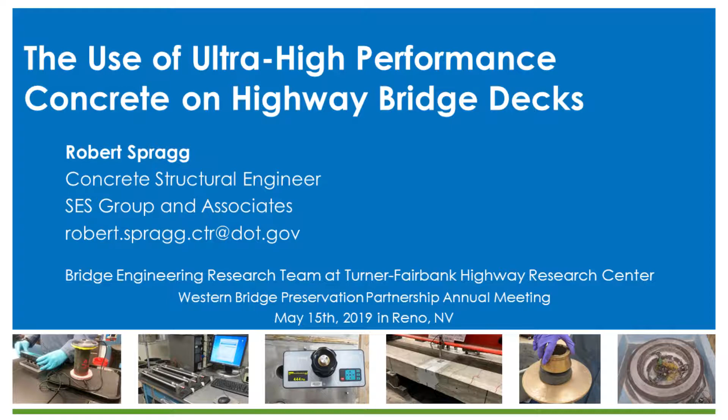I'm going to be talking about the use of ultra-high performance concrete on highway bridge decks, and specifically looking at bridge deck overlay applications of this type of material.

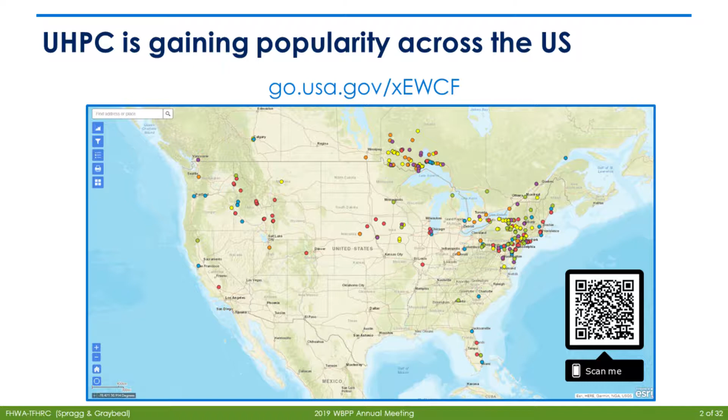UHPC is gaining popularity in the United States. Here's a picture of the projects that we've kept track of that have happened across the United States since 2016. If we look at the region probably of most interest to the people in this room, we see there are a fair number of projects. Maybe some of you have had the opportunity to work on a UHPC project. These projects include lots of different types.

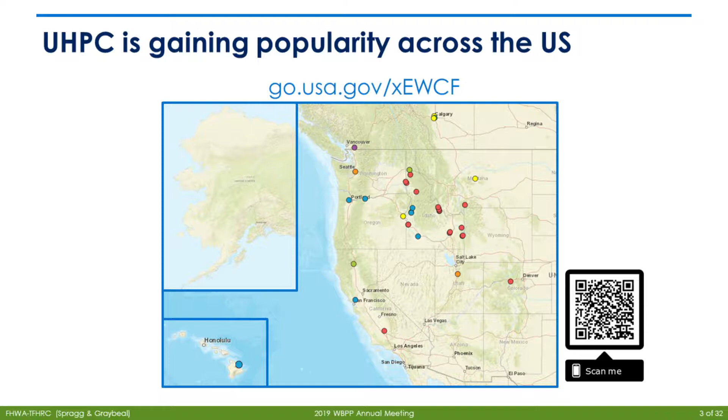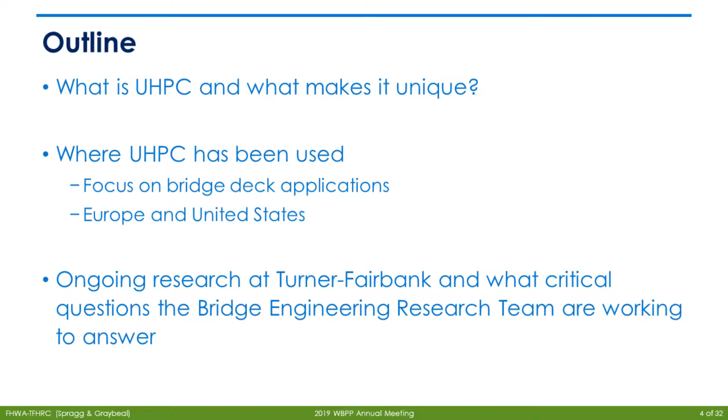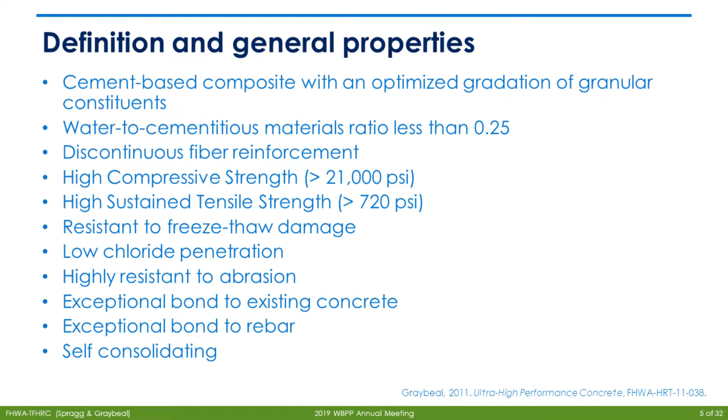It does have fiber reinforcement, and most of the time for structural applications these are steel fibers. It has greater than 21,000 PSI compressive strength and then greater than 720 PSI tensile strength. And it has a lot of other properties that are also important.

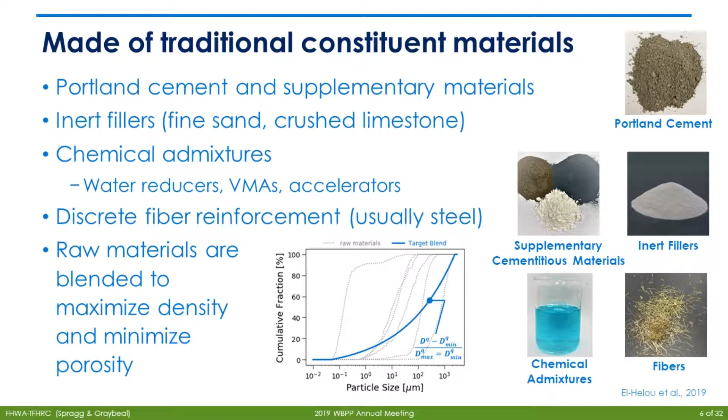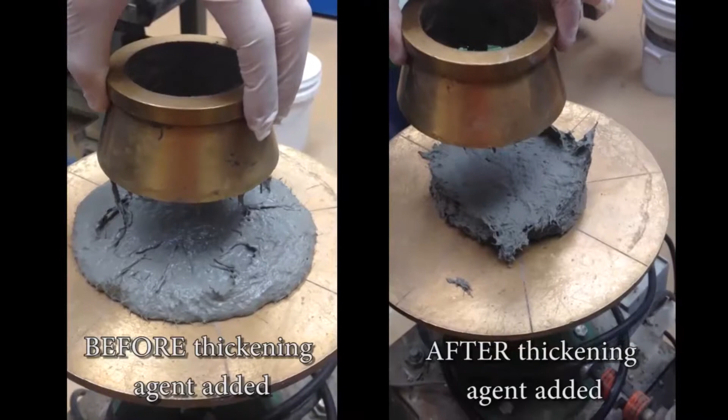This might look like - or a video, I guess. So UHPC in most typical applications is used like the one on the left, which is like a self-consolidating material. But in applications where you're worried about a bridge deck that might have a super elevation, you would probably want to add what they call a thickening agent, basically to make sure it doesn't move around too much or flow off your deck into the water below.

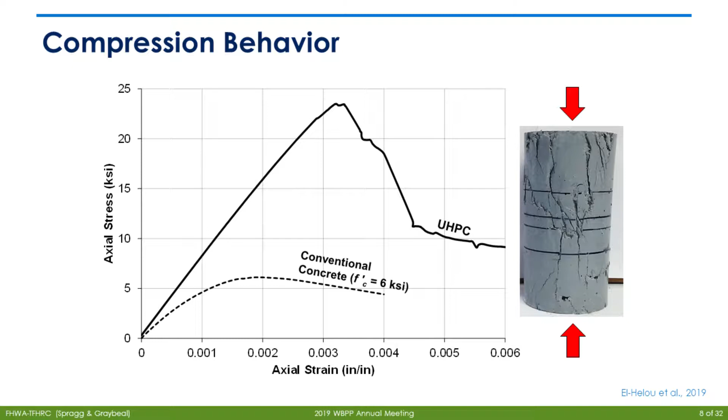We call this type of behavior - where it only moves when being vibrated, but stops moving when you take away the vibration - thixotropy. So this material is thixotropic. Compression behavior is very similar to normal concrete, except maybe a little bit higher. The real special part of UHPC is its sustained tensile behavior - you're able to reach about at least 700 PSI, and also it's able to sustain that over a larger amount of strain.

UHPC is available from a lot of different manufacturers - there are commercially available options. A lot of times, as these are included in the bid packages we've seen, they've been included along with some material on-site quality control because they are kind of sensitive to admixture or water content. So typically the producers will batch that all together.

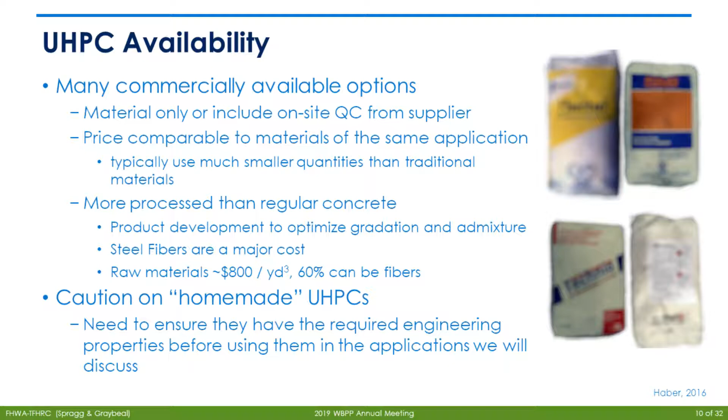For a typical application, the price is very comparable - we'll see some actual numbers in the next slide - but typically you're also using much smaller quantities when using these higher performance materials. As far as where the costs come from, the price of the steel fibers is significant, especially with requirements for federal or partially federally funded projects that they be purchased from an American manufacturer. This can be up to 60% of the cost.

Just because I have to put in this disclaimer, you sometimes have to be cautious about what we've called homemade UHPCs - this would be a ready mix producer who says he's able to get these types of properties, listed on the second slide, in a concrete mix that they can do in their truck. There's a lot of development that went into making sure it has the right kind of bond to the concrete, the right kind of development length in your steel reinforcement, and things like that.

So you would have to make sure that you look at those properties for that particular developed homemade UHPC.

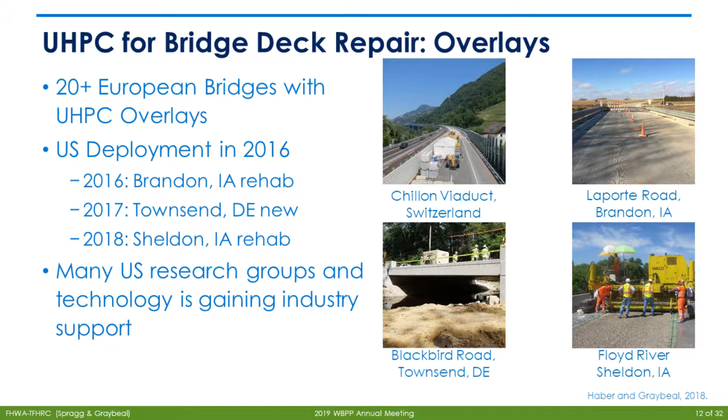Looking at some typical applications we've seen in bridge decks, we're going to talk about 4 projects. The first is the Chillon Viaduct in Switzerland. This is a nice project to talk about because it's a signature structure, and it was very difficult for them to take out of service, so I imagine a lot of you have that experience where you can't tell people you're going to close down an interstate bridge. The other 3 projects, which took place here in the United States, have been low volume roads, either rehabilitation or new structures, on typical applications where that wasn't a main concern.

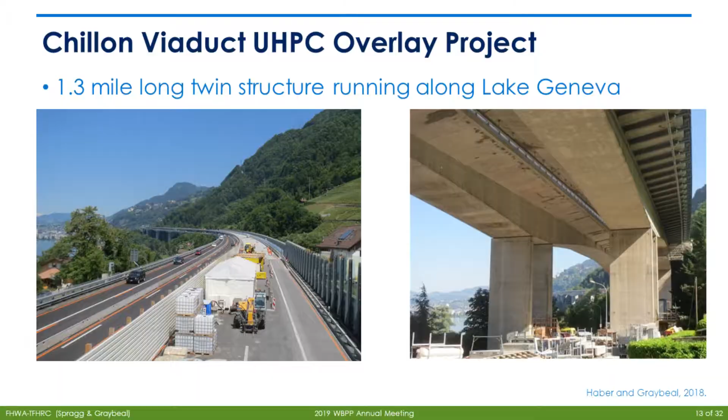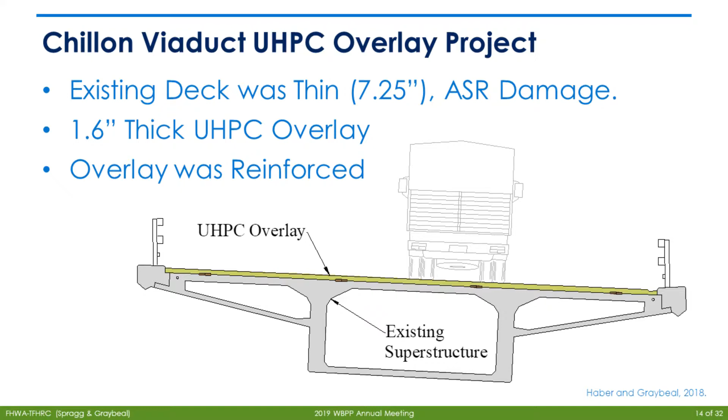The Chillon Viaduct is a bridge in Switzerland. Here's some photos of what that looks like. This is the existing structure, and you can kind of see that it looks very slender. I saw it and thought, wow, I'm glad I don't drive in Switzerland. They were putting a 1.5 or 1.6 inch UHPC overlay on top. This particular application wasn't necessarily looking at rehabilitation, but also included some strengthening. They did calculations showing the primary goal was to increase the structural capacity of this bridge, but it gives us a nice example of what this would look like if we were to implement this in the United States on a big structure.

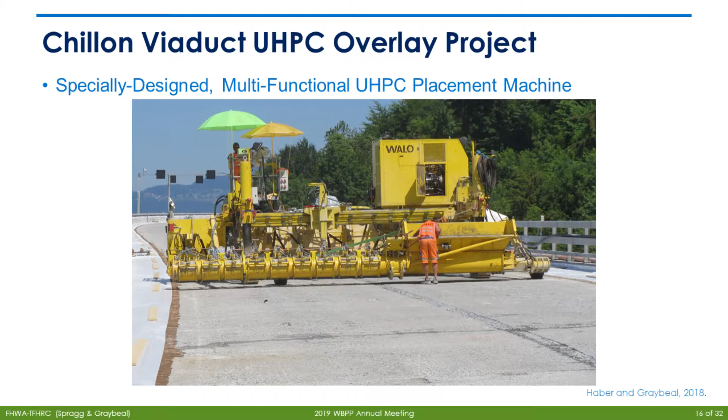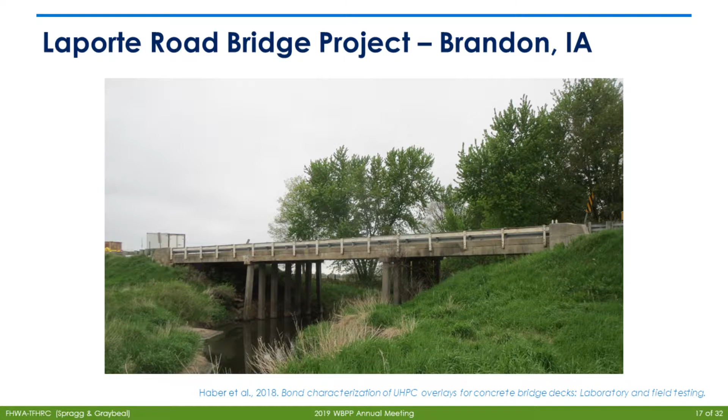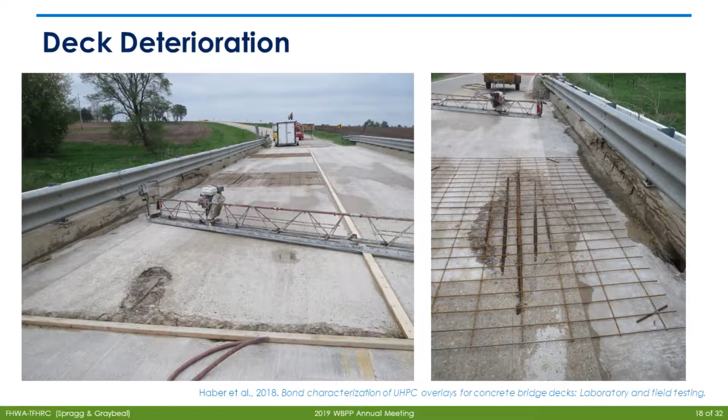Transitioning to projects that have happened here in the United States, this is one that happened in Brandon, Iowa. You can see it's a relatively low volume road. Here's a picture of what the deterioration on the deck looked like - some spots had a significant amount of spalling. Again, they put some reinforcement, which depends on the design of the overlay and whether you would need it or not. In the large potholes that they cleaned out, they also put some rebar in there as well. They hydromilled prior to putting the overlay, so you can see what that surface profile looked like, and we'll see some more pictures under the microscope in the next couple slides.

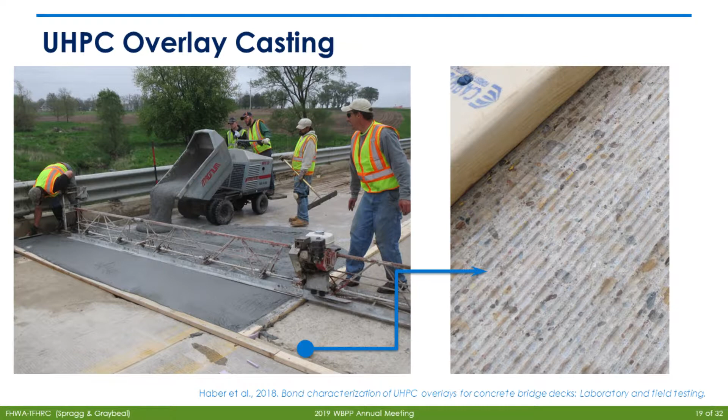You create a partial core and then you attach your pull-off disc, and then you have a pull-off machine that just kind of pulls that disc off. Assuming you get failure at the interface, which is most of the time if the glue is good, you can calculate what your bond strength was.

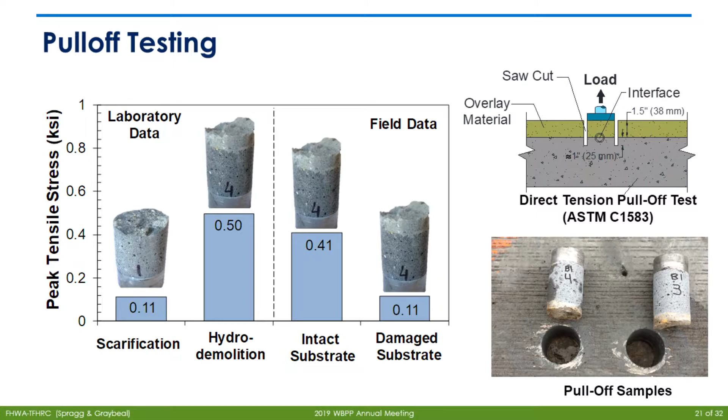Here's what the data looks like. Looking at field data and laboratory data, you can see that scarification was a little bit lower than hydrodemolition, and some of the other methods we looked at as well. The reason has to do with how well the overlay is consolidated, and also damage that might happen to the aggregates during the scarification or hydromilling process. We'll take a look at that in the next couple slides.

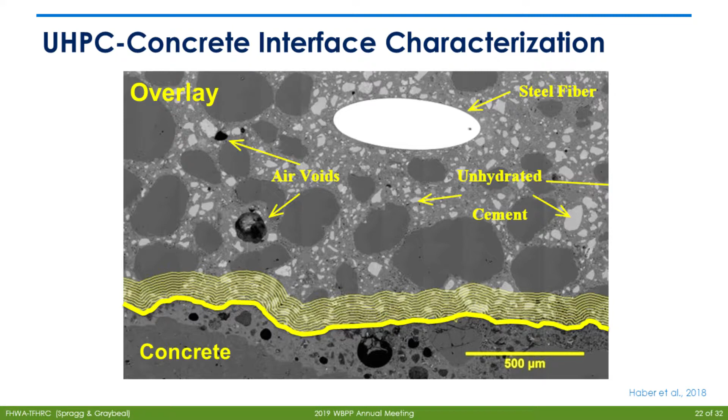You can also see the steel fibers - those are the parts in white. White represents density, so white means higher density. You can kind of see on average the UHPC is denser than the concrete below it.

But when we took these samples from this project in Iowa back to the lab and looked at them under the SEM, we could see that we did end up with cases of poor consolidation. So that's one of the key things we're looking at moving forward - how can we ensure that this UHPC overlay is well consolidated.

You can imagine the video we showed in the first couple slides where you have a self-consolidating material - that consolidates very well. But in an overlay where you have super elevation on your deck, it's really hard to use a self-consolidating material. So you have to use this thixotropic formulation, and you have to make sure you put enough energy into it that it does consolidate and has good bond strength.

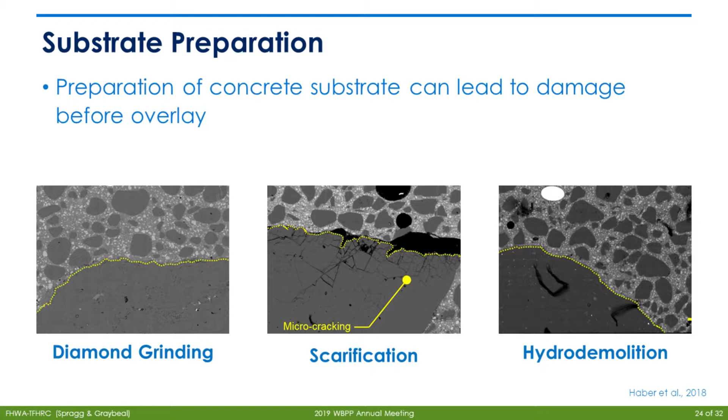You can see scarification does do some damage. I don't know if I've zoomed in far enough here on the photo, but this big gray piece here is a piece of aggregate that has some microcracking in it. That came from the scarification process.

Then hydromilling or hydrodemolition was another technique that we saw. So far we've really liked the hydromilling or hydrodemolition process because it doesn't seem to damage very much of anything. It'll blow away the paste for the most part, but it doesn't really cause any damage that we've been able to see under the microscope.

But when looking at a particular substrate preparation method prior to an overlay, it's important to look for something that has both micro and macro texture. The hydrodemolition has that micro texture because you're exposing some of that aggregate, but the way that they do it also gives it a macro texture - you could visually see a wavy pattern is there. That really helps to increase the tensile bond strength, but also the shear bond strength, which is another important parameter.

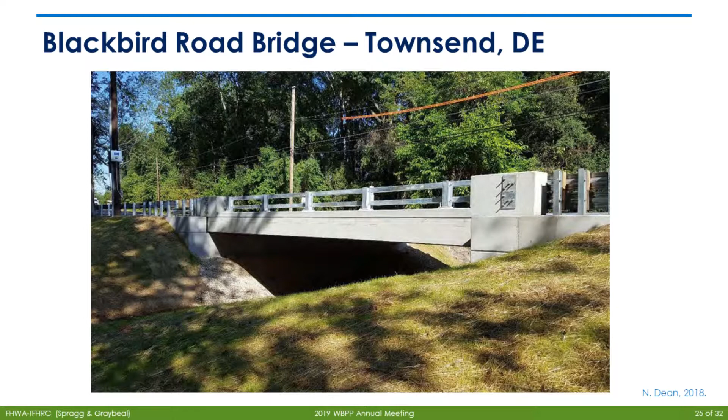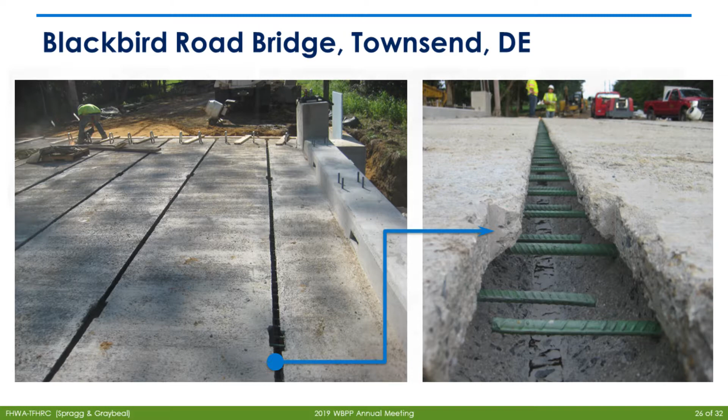Another project was this new construction in Delaware. These are adjacent box beams that were cast with a UHPC closure pour. After the closure pour, they came back and put a UHPC overlay on top. Here's an example of what the connections look like between the box beams, and this is the closure pour between the box beams.

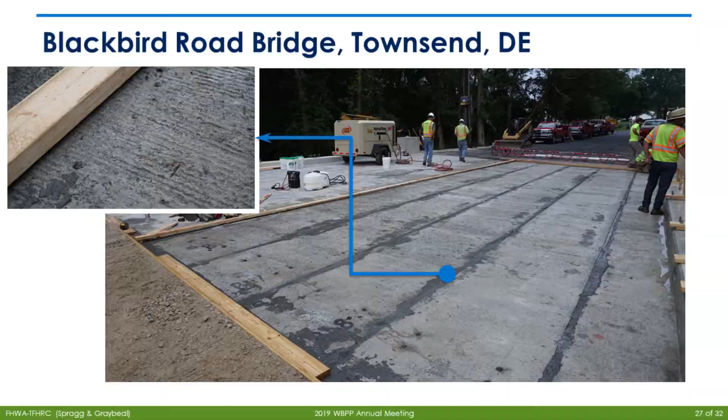This is UHPC - this would be the UHPC that is self-consolidating. And then this is them coming back and putting that overlay on top. The vibration you hear is actually the vibration of the Bid-Well, trying to make sure they're providing enough energy into that thixotropic material so that it flows enough to have that good bond characteristic.

And then they would just slowly crank it across the surface of the deck to try and move it along in front of the material. So you can kind of see how the material, once you pour it, it doesn't really go anywhere, and they have to spread it out with their rake.

And then the last application is an overlay that they were doing in Sheldon, Iowa. Again, this was a rehabilitation project. They did an inch or 1.75 inch overlay. They did hydrodemolition, and then used that UHPC placement machine that came over from Switzerland.

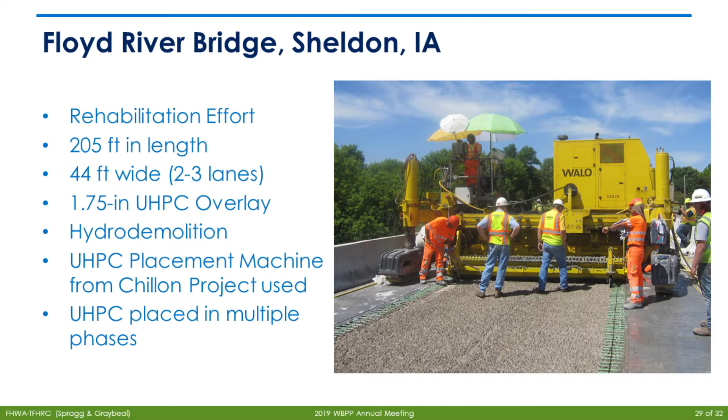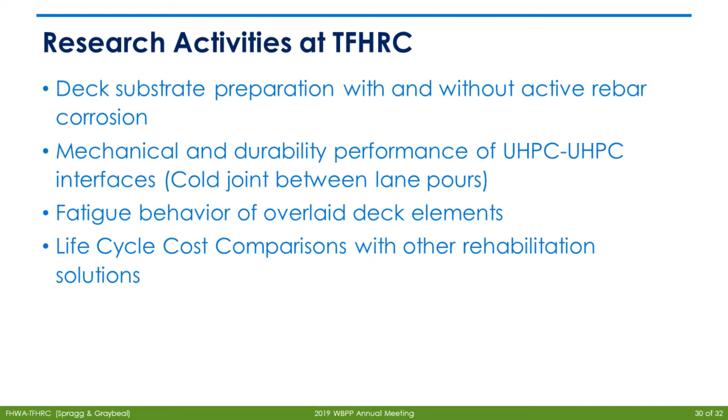We're looking at mechanical and durability performance of UHPC interfaces. So you could imagine if you're pouring adjacent lanes, you'll have a cold joint between those lane pours. We want to make sure there's no concern of chlorides or moisture getting down between that cold joint and propagating along the interface between the overlay and the concrete material itself.

We're looking at fatigue behavior of overlaid deck elements, and lastly looking at life cycle cost comparisons with other rehabilitation techniques. There we're trying to look at the motivation and make sure we're providing the best value of whichever overlay rehabilitation technique you decide to use.

So there are lots of resources available if you would like to look at overlays or specifically UHPC overlays. We have a research website along with a couple reports, some summaries of field visits, a couple journal papers that are peer reviewed, so at least you know we're not just saying it ourselves. Somebody else has looked at it.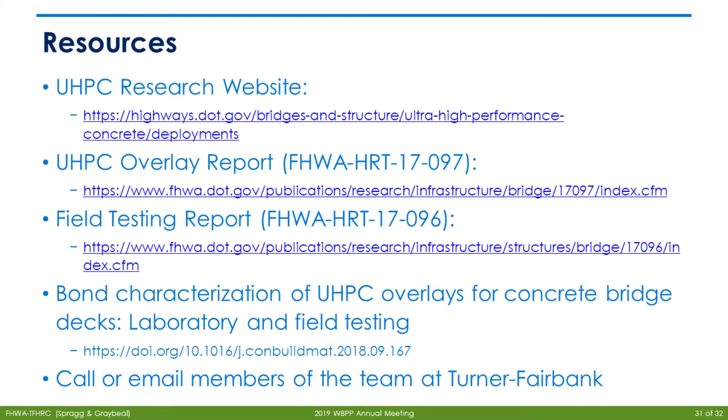And lastly, you can feel free to call or email any of the members of the research team, whose emails are here. So if you have any questions, feel free to email us. I guess I'll take any questions.

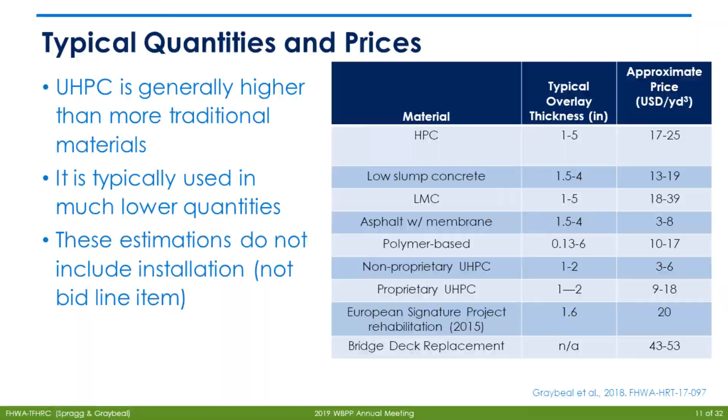Sure. So the costs that we have here are material-related costs for the projects and bids that we've looked at. These don't include placement costs, they're not bid line item values that you would see in a bid, so don't get confused by that. It should be US dollars per square foot.

But you can kind of see that the UHPC or proprietary UHPC, which would probably be most typical applications just because there's a lot of engineering that goes into making these materials, is probably on the order of anywhere from $10 to $20 a square foot for the material.

So you would expect, especially with the large fiber content, up to 2.5%, or even the overlays up to 3.5% fibers, that really helps distribute the cracking you might see. I don't know if I'd be able to give you an exact number, but I think the fiber distribution would help distribute the cracks a little bit better. I'm not sure I could tell you that one. I would have to get back to you on that.

These materials do have a relatively low water content, so you have to make sure they are protected from evaporation. In this project in Delaware, I believe they put a plastic sheet on the overlay as they cast it, placing a plastic sheet on the overlay behind it. But you do want to make sure to protect it from evaporation, whether with a curing agent or something like that. This technology was pioneered in Europe.